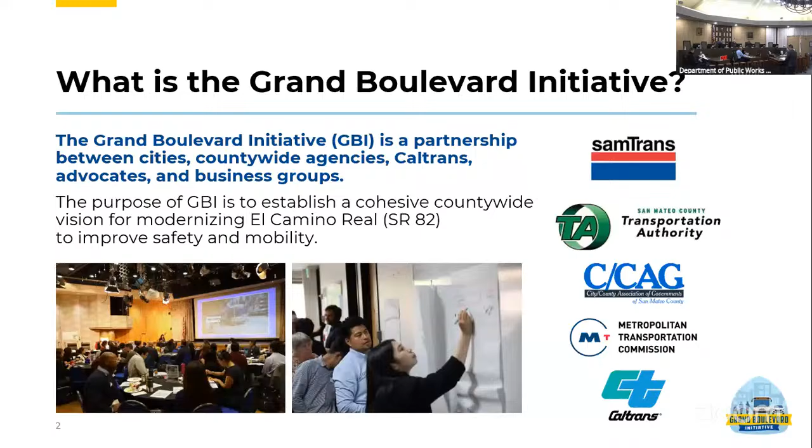Next slide, please. This effort requires a ground-up and top-down approach. We have to understand what cities' visions and needs are, as well as define a broad set of regional and countywide goals so that cities will buy in, to ensure consistency across the cities. Over the past year, we've convened the GBI task force, which includes the cities, public agencies, and advocates and business groups I previously mentioned. These meetings involved a series of 7 workshops over the last year, starting large by defining the priority problems and then narrowing it down into vision, goals, and actions. Often during this process, we've asked city staff to put on their regional hats. In addition to convening the task force, we've presented to Public Works and Planning directors in January 2025 and conducted a roadshow to city councils in fall 2025 to gather input on the action plan. Next slide, please.

Public engagement happens at the local level during these planning studies, and alternatives are developed locally. GBI serves as a forum for collaboration across these local studies and knits them together into a comprehensive countywide vision. It's important to note that Burlingame is the furthest along of all these cities, as construction will begin early next year. GBI's goal is to help cities navigate the lengthy Caltrans approval process that Burlingame just went through, but doing so as a coordinated effort to ensure improvements along El Camino Real are deployed at the same time corridor-wide.

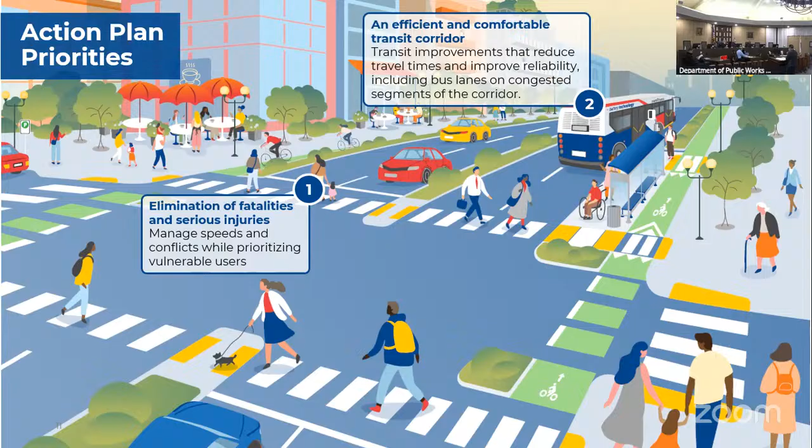We want to make an efficient and comfortable transit corridor, with transit improvements that will reduce travel times and improve reliability, including bus lanes on congested segments of the corridor. We also want a continuous bikeway for all ages and abilities, a corridor-wide backbone bikeway on El Camino Real or on parallel streets.

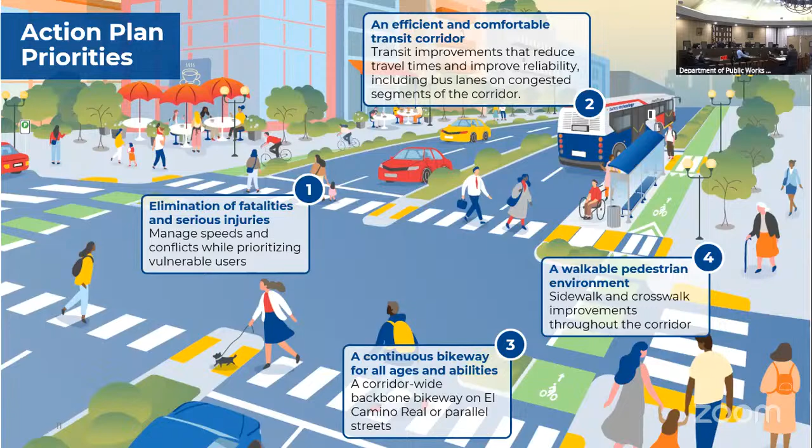And lastly, we would like a walkable pedestrian environment. Sidewalk and crosswalk improvements are needed throughout the corridor.

This whole process is owned by Caltrans and requires an extensive timeline, meaning we'll likely not see whole-scale improvements on the corridor for at least 8 to 10 years from now. But as I've mentioned, Burlingame is first along in this process, of all the cities having gone through this Caltrans process already.

This is where Samtrans and our project partners show value in leading this effort. It's a long and challenging process that we're guiding cities through together. Given that this is a 22-mile streetscape project, it's a much different scale and level of challenge than any individual city. Samtrans and our partner agencies will identify funding sources and work hand in hand with cities to make this project competitive for large funding sources.

Lastly, for next steps, we have our draft action plan available for public review. It's online at samtrans.com/GBI. We just went to our Samtrans and TA boards last week as an info item, and we'll be going back again in January 2026 to seek adoption of the action plan.

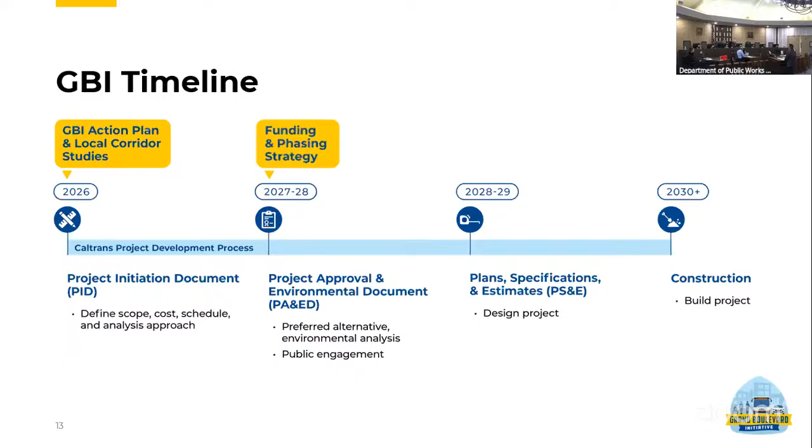I have some questions, Mr. Yee, comments. So this is very early, right? Whereas the project initiation starts next year sometime. Yeah, and this is a big view - we're Burlingame, we're a little piece in the middle, and we have our own needs and implementation to satisfy those needs. But when we integrate with the entire GBI, the whole section there, the interfaces are going to be critical, as you pointed out.

So we are in implementation for all practical purposes, so our interfaces are going to pretty much be fixed. So in consideration of the segments adjacent to our city, those interfaces, I'm assuming, are going to be fluid, and the transition between cities is all being carefully studied - is that right? Yeah, we haven't fully studied it yet, but it's in the works.

And Mr. Wong, the constraints on this project have not really constrained what we're doing in Burlingame for our segment - is that correct? Correct. We're staying with the cross section that we have. We're not going to change it - there was no talk of a road diet or anything like that. We are fixed at what's out there now; it's going to be similar to what's out there now, just much more improved with pedestrian enhancements and obviously a better walkway along both sides that we don't have now.

Right, I just want to confirm that. I mean, we have a design, it's ready to go - it's going to start implementation next month, and this is what we're going to implement. And hopefully this larger project is going to learn best practices from what we've done in Burlingame, right?

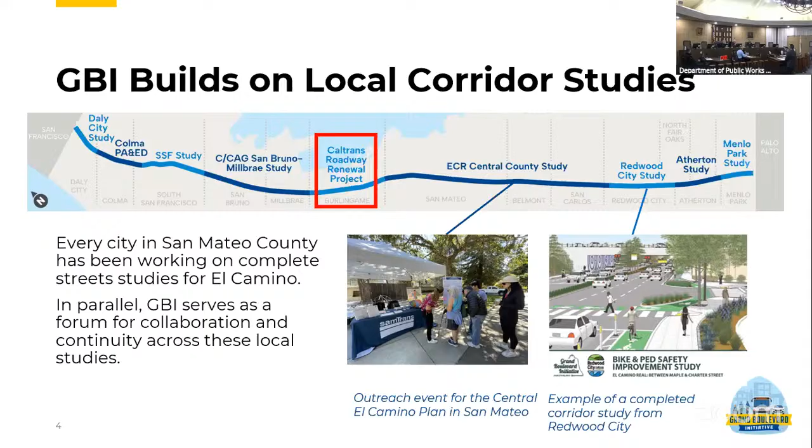I know we have some challenges about how we're going to close segments of the roadway and route things through neighborhoods, which is a separate challenge. But beyond that, just the construction best practices that we might learn here in Burlingame since we're first. I wanted to look at one of your slides that talked about the problem statements and serious injury crashes, and again I want to narrow the scope to Burlingame.

These aren't Burlingame specific based on data, is that correct? These are more across the entire roadway, and it doesn't give numbers or anything - so it's high-level, relative, qualitative, not quantitative. But am I correct in assuming that this is not an indication of the fatal and serious injuries that occur on El Camino in Burlingame specifically? Is that right? Yes, we're not calling out Burlingame.

I think if I remember off the top of my head, what's kind of guiding these statements is there's a lot of incidents at Millbrae Avenue, because anecdotally a lot of traffic is coming to Burlingame from there. I think that's why there's also a lot of incidents there, especially with that triple left turn lane - that's a known hot spot. And then there are a lot of hot spots here and there, but it's not like we're calling out Burlingame in general.

Specifically, it's just kind of general. Yeah, I mean any collisions, especially fatalities, really get our attention here. You're talking about near the hospital, and there are schools over in that area, so there's a lot of cross traffic going across El Camino. But yeah, okay, so that was one thing I just wanted to confirm.

The Broadway grade separation update for you folks. Some of it'll be what a lot of folks already know, but we're just going to present you tonight an update on the schedule and where the project is.

More importantly, what we want to talk about is the design team — we've been working with them, and they've come up with pedestrian crossings since, we'll talk about, there's no longer a station, but new pedestrian crossings. We're trying to cut costs on this project to do whatever we can to keep it going so we can make it viable sometime in the near future.

What they've come up with are 3 options. We wanted to share it with the commission to get their feedback. Staff has a recommendation or suggestion on it, and we'll present that to you. Then hopefully we'll get feedback from you folks, get some support so we can allow the design to continue.

The goal is, even though this project isn't fully funded, we can get everything ready so when the funding does reoccur, especially at the federal level, we'll be first in line because we'll have a shovel-ready project — the design, all the permits have been gone through, it's been vetted. So it's simply a matter of getting the money and then being able to start it.

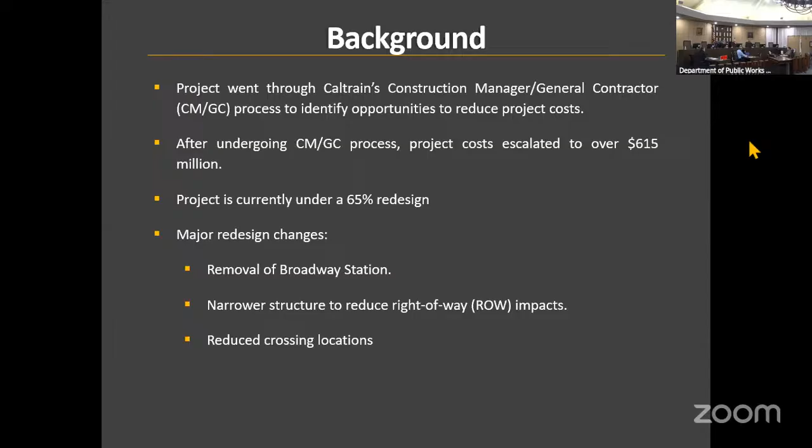So here's the train crossing. Broadway is here on the left going down. You've got Broadway here, moving to the middle. It's Cadillac up on top, and we had a Cadillac crossing, and we have the Carmelita crossing, as well as down the line. There's an at-grade pedestrian crossing at Morel, which was going to be pushed up and become Majilla. Rather than at-grade, it was going to be a tunnel. So right here you have a crossing on the north side, the south side, Cadillac crossing, Carmelita, and Majilla.

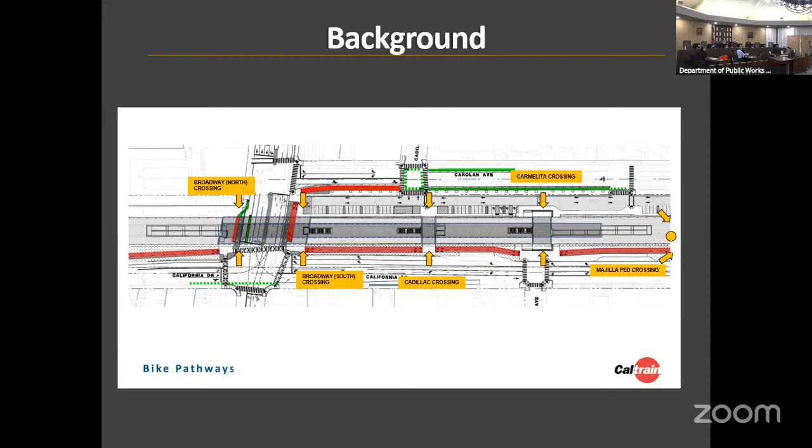So we had 5 crossings ultimately. Realistically, we only probably had the one at Morel — that's actually an at-grade crossing. The Cadillac and Carmelita crossings didn't exist, and Broadway is what it is today.

So the first proposed is the Cadillac — sorry, Sanchez — crossing. We would continue to have this structure here on both sides of Broadway. However, they'd be narrower because originally with the station, the openings would be much wider since there would be a pedestrian entrance to go up to the platform on top. So that's been narrowed to still be a Class 1 facility. I'll show you more on the next slide. Here they have a crossing near Sanchez Creek — it's a Caltrain maintenance access for them, but it would be widened enough to allow pedestrian public use. So that's one of the options.

Previously on Carolan, it was going to be a Class 2A facility on the street. This continues to be a Class 1 facility, which now wraps around where the station would have been, because there used to be parking along Carolan, and the plaza there was a walking plaza, which just kind of continues to be.

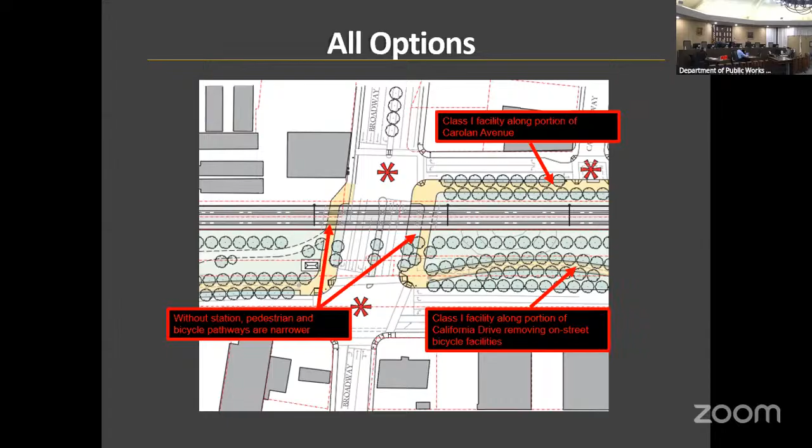The next option, we continue to have the two here, and we add a third one here at Cadillac. In this case, hopefully we're still pushing for a traffic signal at Cadillac and Carolan where one doesn't exist now. This will allow folks coming across Carolan to cut through there. Our thought is this placement allows access onto Cadillac, access onto a bike crossing over 101, and then you can continue out to the Bay Shore.

So it's much better, much slower access along that versus Broadway, because once you get on top of Broadway, you're dealing with a higher stress area with cars and multiple lanes.

The next option would be, rather than Cadillac, have it at Carmelita, because it aligns with Carmelita entering the station - or crossing the tracks, I'm sorry. So that's the only difference here. Option 2 and option 3 are just two different streets; everything else is the same. Let me give you an example of what the crossing and what we're talking about.

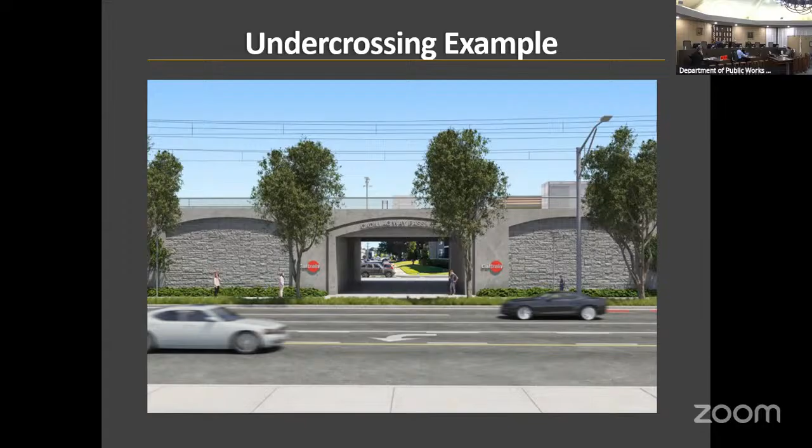It's not as grand as it might have been with the station, but it's a cut through underneath. This one is an example of what Cadillac is proposed to look like for folks to go through. Here's an example of the path that would go all along California, along both sides of Broadway, as well as down Carolan.

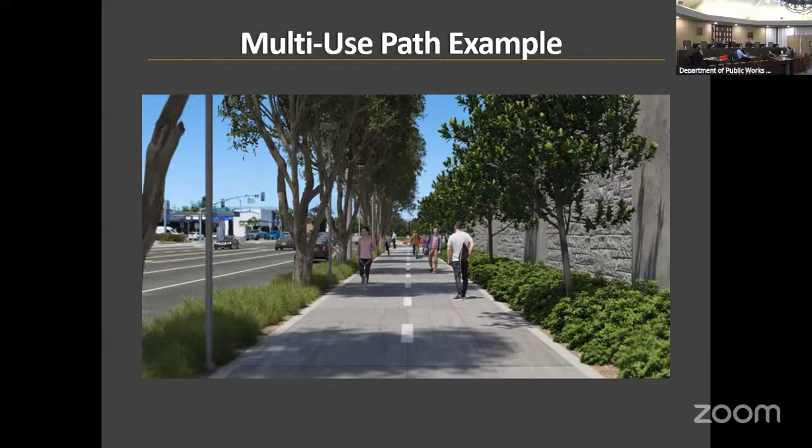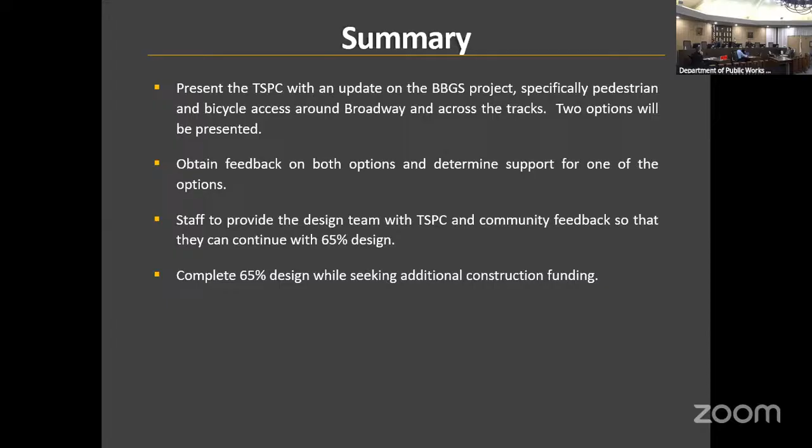Again, the goal tonight was to show you this, answer any questions you might have, and then hopefully we'll take some of this feedback and bring it to the design team so they can continue and move forward to get to that 65% design and continue the project. So with that, any questions?

Thank you, Mr. Wong. Commissioners, questions? Yeah, I have a question. Sure, go ahead.

So the Carmelita, you said it aligns - what's the benefit of that? Is there a cost reduction when it aligns? Or what's the difference between the three, like option 2 and option 3? Oh sorry, I didn't even get to the staff recommendation. So roughly each crossing is several million dollars, just with the design and the reinforcing structure around it.

So the benefit of Carmelita versus Cadillac is just alignment - it doesn't change anything. If you go back to this one where we have it aligned with Cadillac, staff recommends Cadillac, for the reasons of energizing that area. Because right now, if you're coming from Cadillac onto Carolan, you have to wait to make the turn, either right or left onto Carolan. For pedestrians crossing, it's the same difficulty - you've got to wait for a clearance. Potentially a signal there helps folks move traffic through easier.

Other options are maybe if it's low vehicular volume and strictly pedestrian and bicyclist traffic, you have a push button - that hasn't been vetted, but some sort of control there would help and hopefully bring people through to get them up and over, because once you get on the bicycle overcrossing, that's solely for bikes or pedestrians. Then you get to the corner, and at some point we'll be able to transition better - you can get onto the Bay Trail, but you can definitely get to Bayside Park from there and cross over at the driveway, which enhances that area.

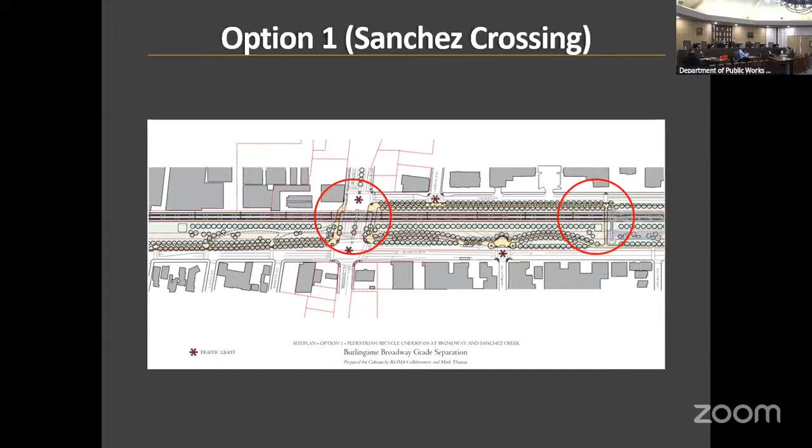Just thinking how convenient - one of the other options of adding Carmelita or Cadillac makes it a little more convenient for folks to cut through. Yes, and we agree there's a trade-off, because if you put something closer here, it has the potential of that happening. So that's why initially we start with something less, or the signals get coordinated.

Okay, I'm sure - look, I trust you guys implicitly. I'm just, again, visually, I've driven down there quite a bit. I just wanted to make sure it was all taken into consideration, the distance. That's the only question I had as well, that distance there.

Mr. Wong, following up on what Commissioner Brown said - the signals, if there's a signal at Cadillac, and the left turn is initiated by the signal at Broadway, those could be coordinated, right? So the Carolan flow of traffic would be enabled by a green signal - it's kind of like a train track almost, so that things don't back up. Given that at this phase, fingers crossed there are no tracks to interfere, we can make that better than it is now. Right now, if we tried that at Cadillac, it would be impacted because of the short time we could allow for left turns. But given there's no tracks, we can increase that time. So let's go back to option 2.

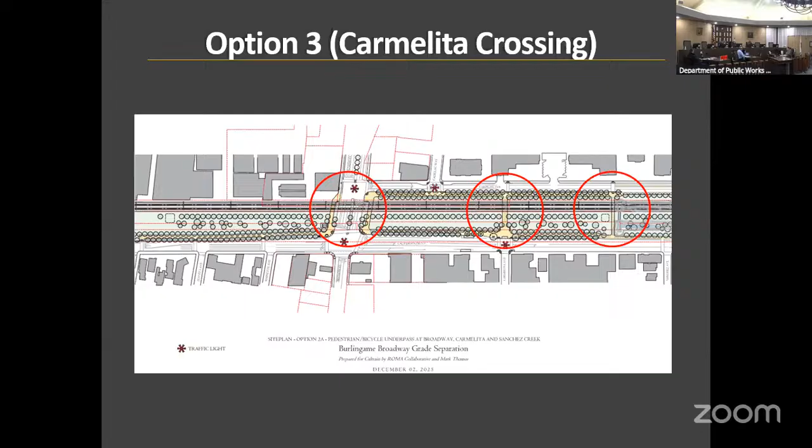Yeah, I move that we approve option 2 with Cadillac Way, the structure that's planned for Cadillac Way.

Okay, is there a second? I'll second that motion. All right, given that it's underground. Okay, yes, all right.

Ms. Brewer, can we have a roll call vote, please? Brown, yes. Commissioner French, yes. Chair Martin, aye. So the motion passes 3-0.

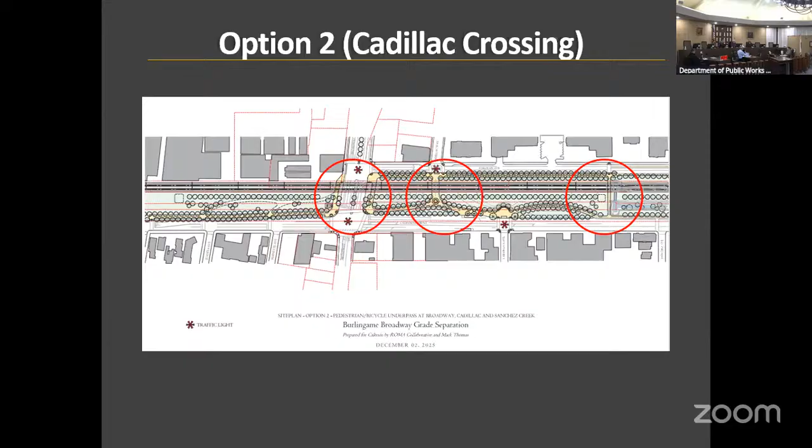Mr. Wong, we are in favor of option 2. Thank you. Yeah, thank you.

All right. Now go find the money.

I know, it's crazy. This next one will... All right, item 8C is SMCTA. This is Old Bayshore Highway Complete Streets.

Sure, thank you, Chair Martez. I'll have a little better story for you. Old Bayshore Highway, the Complete Streets project. This meeting's goal is to give you a little update on this project, especially since at least 2 of the 3 newer commissioners who weren't exposed to this project back when we did the feasibility study are here tonight.

We'll get very preliminary feedback, and I say preliminary because you'll see the chart showing where we're at in the development process. So let's get into it.

Back in 2022, we completed a corridor study, or feasibility study, for Old Bayshore Highway. It showed the existing conditions. We went through extensive outreach where we reached out to the businesses out there—it's called something different now, but at the time it was the Silicon Valley Visitors Bureau. Through all that, we developed a preferred alternative with this commission, the community, and the council.

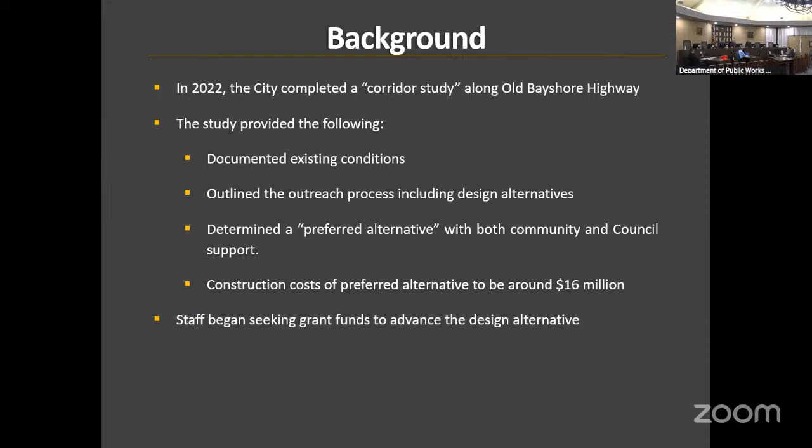At the time, we did our engineer's estimates and found that the construction costs were around 16 million to do this corridor. From that, we began seeking grant funds so we can advance the design. So again,

it's Old Bayshore Highway. It's a key north-south facility we have, mostly hotels and office now, where it's starting to get redeveloped with office, a lot of light industrial out there. We've got shuttles out there as well that serve the Bayfront employers. It's a direct connection to the Millbrae Transit Center.

That's because you just go up over Millbrae Avenue and then you can come down. And if you've been out there, we have a median island, but there are no bicycle facilities other than sharrows out there. The road's getting pretty beat up, and there's some flooding during high tides.

Again, we've got workers out there, not only starting to get office—now you go further south, you've got Meta, we've got a lot of new office developments either in place already or in the works. And there's a lot of service for a lot of those businesses out there supporting the airport.

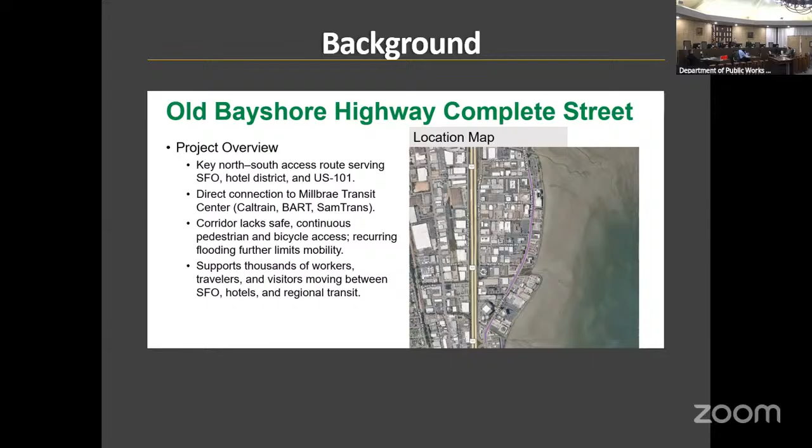So with that, the length of it—the project is from the Millbrae-Burlingame city limits all the way to the US 101 northbound ramps.

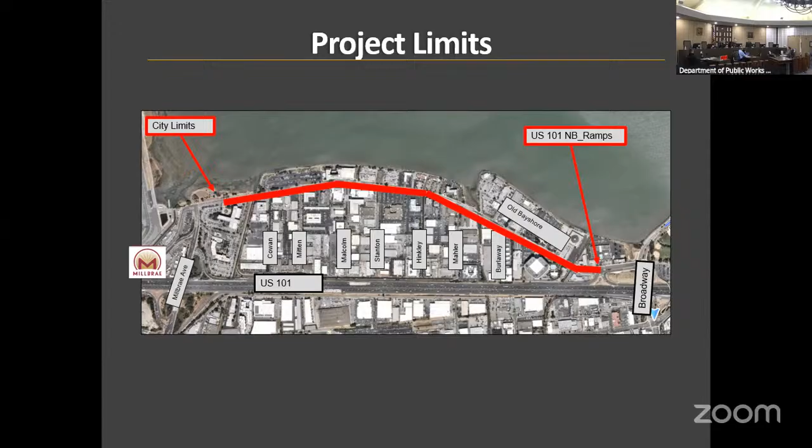Again, the benefits: you'll get a safer pedestrian facility on both sides and for bicycle travel as well. We'll have ADA compliant walkways the entire stretch. The drainage will be much better because we'll redo the curbs and gutters, and it'll strengthen the connection between the businesses and hotels out there with the downtown corridors.

The impacts: obviously we're going to tear up the roadway, so there will be limited access at times once we get to that phase, but it'll improve things. Old Bayshore is kind of a gateway—if you're on a plane, it's the first thing you see coming over, and if you're at the hotels, that's the first thing you see before you get into Burlingame itself. Again, it'll reduce the risk of recurring flooding, and make the facility much improved for bicyclists and pedestrians, a much better walking environment.

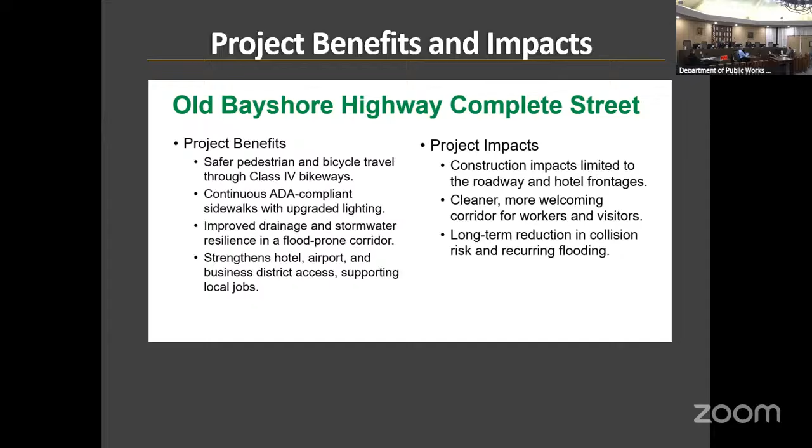So we'll get into some of the visuals. Existing conditions—here's a snapshot, I believe this one's looking northbound. You know, it is what it is out there, and you could see some of the traffic islands that are out there.

Some of them run further south as well along the corridor. Again, flooding, and there's no bicycle facility.

So what was proposed on the alternative or the preferred concept was we have 1 lane of travel in each direction, with left turn pockets still able to pull turning vehicles out of the queue.

California Drive is 2-way, this is 1-way, so you'd have this facility on both sides. But you see the dashed striping at the driveways and at cross streets.

Better crossing, we'd be able to have more pedestrian refuge in the middle, but we're also creating a shorter crossing distance of traveling active vehicular lanes.

We'd also have bus stops where the buses would be up against it, and they would stop in the lane. However, the pedestrians would be queued here, able to walk across and enter the bus, just to make it safer so you don't have folks coming around.

I'll have to thank my colleague, Mr. Yang. He put together some of these slides, as well as made the simulation to show what's preferred. As you can see here, on both sides, you have the protected bike lane with some landscaping, and here the median, and the single travel lane in each direction.

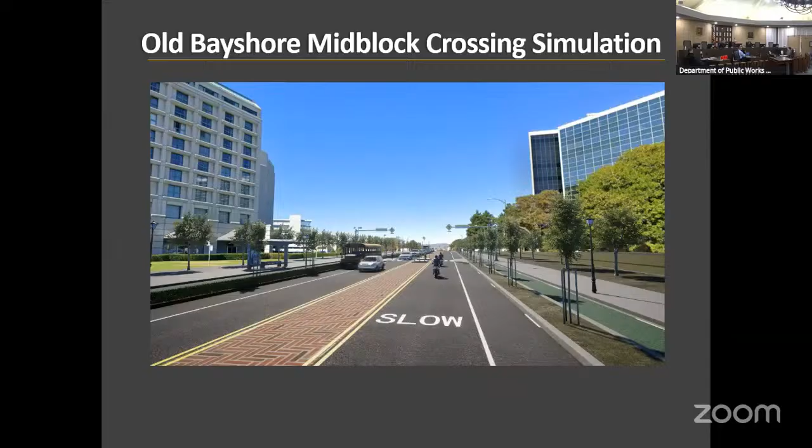So now we get to the good news—you'll really be thanking Mr. Yang. As we said, we've been seeking grant funding for this. We want to enter, as you saw earlier in Mr. Yee's slide, the project phase, the PA&ED, the environmental documentation, the design phase, which is the plans, specifications, and estimates, and then finally construction. We applied for the highway fund most recently, and we were awarded, well, we're about to be awarded. It's gone through the CAC, it's gone through the board, so it's merely preliminary. They both supported it. We were looking at 19 million to complete the project.

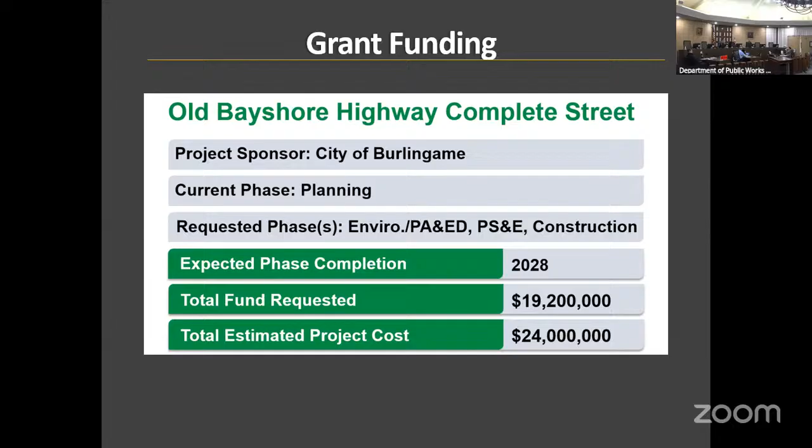And here we are. We got, hopefully, the funding. Now what we're going to go through, we're going to select a design team to go forward to advance what we've already got. We're not starting from zero. We have the feasibility study. We know we have a preferred alternative.

We're going to advance that now into design. We're going to be seeking feedback from the community as well as the commission on the details. And then we will get to these other phases. So right now we're going through the request for proposal phase, seeking a design team.

Once we get that, we'll have our own internal project kickoff. We'll get the design team and have our first outreach meeting sometime next year where we'll show the community—we'll be representing this Old Bayshore, here's how we got here—and show them. At that point, maybe this meeting we may even jump in and throw in the concepts, reintroduce the concepts.

And then we'll have a second meeting. We'll take some of the feedback that we'll get, and then we'll go through the process of tweaking that. Ultimately what we want to bring to you is something showing the location of these things, where the turn pockets are roughly, and a little bit more of what it's going to look like.

And then we'll take it to council with the support, hopefully, that we get from the community and the group and the commission, and show it to council. And then once they have that, we will go out to bid, select a contractor, and hopefully tear up another street to make some significant improvements in town.

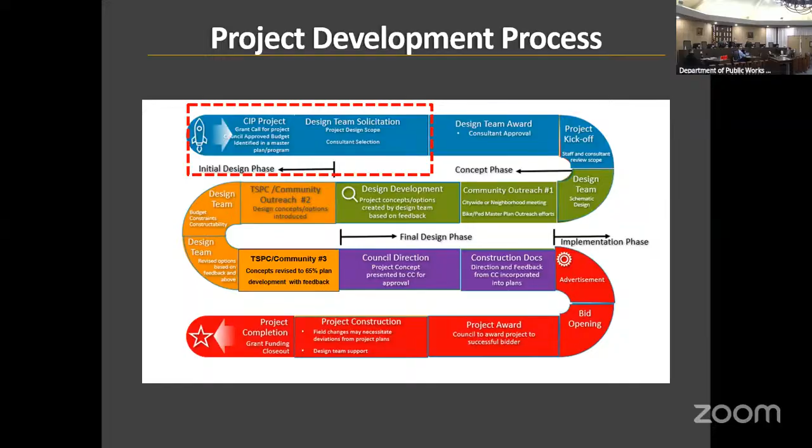So with that, as I mentioned, we're in the RFP process. We'll select the design team, and then we'll go through it. I won't even give you a timeline on when we think construction will be, but it's nice knowing we have the funds ready to go, and we're already starting to get the designer. We have the feasibility study, which is a huge jump.

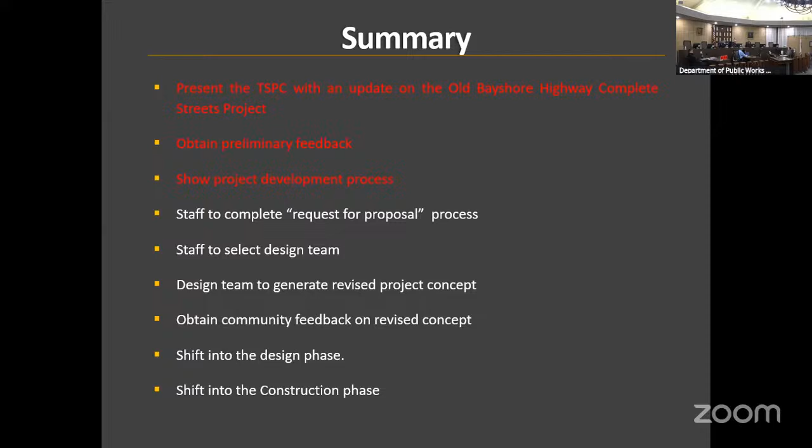So with that, I'll take any questions. Okay, thank you, Mr. Wong. Question, commissioners?

No questions? I think it's early in the process. I think it's good, but it's kind of early. I really don't have any questions either.

I had a couple. With the single travel lanes, you said buses will be traveling as well, and there's no bus stops, right? So the bus will just stop in the travel lane and block traffic for a period of time. Is that right?

So there's a ramp for bicyclists to go across—it's a shared area. They cross that, then they enter the bus, and the bus goes on, and the cyclists—I haven't seen enough of this, like are they yielding here and then going? But we'll look at how that's striped or signed.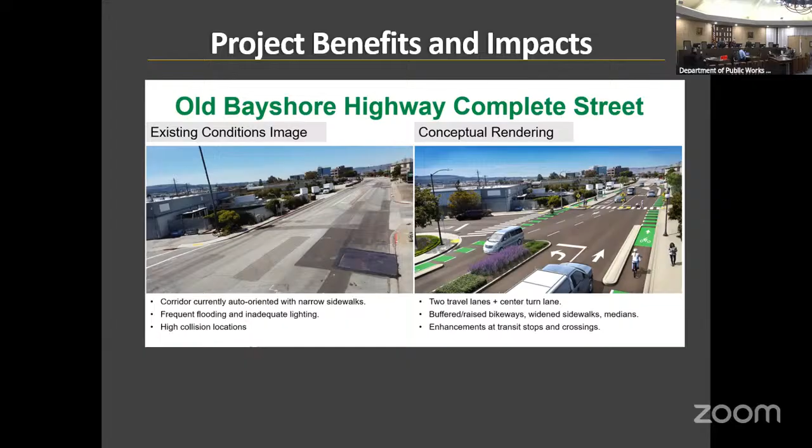Yeah, looks good, Mr. Wong. Happy to see this. Boy, it's pretty hideous looking on that left slide right there—it'd be a big improvement. Surprised that picture isn't in black and white, because it really looks bad. We'll be back to you—you'll see this plenty of times before the shovel hits the ground. Okay, very good, appreciate it.